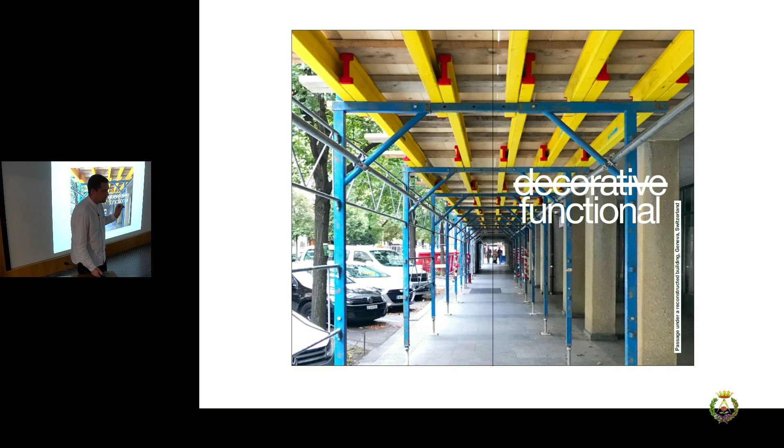This is a very interesting typology in Switzerland, which marks the future building for the democratic process of voting for the future development. So these sticks are not just there, they're marking the future development, and it's not at all decorative, it's functional, because when we analyzed it, each color has a meaning. These colors are not chosen because architects decided so-and-so, but they mark danger, or they indicate there's flammable liquid, and so on.

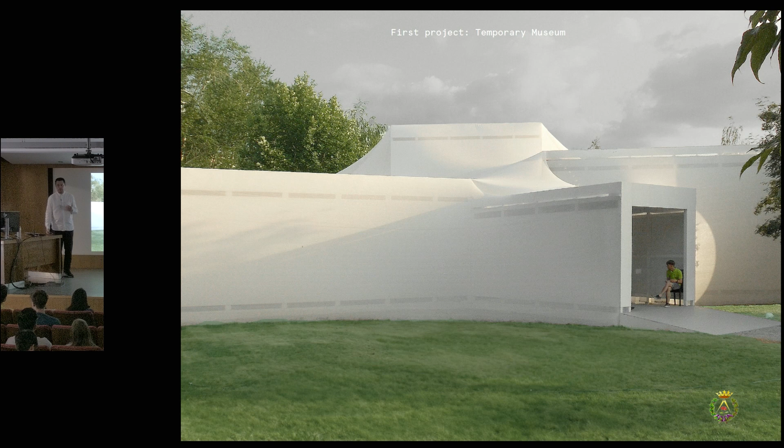And these kinds of structures were also a source of inspiration for us. And the first project, our first won competition, and the first project built, was a temporary museum. We used debris netting, the nets which you saw in many of these examples, this material which is probably known to all of you, in order to make this temporary museum.

And again, speaking about this temporary-permanently idea, there was a museum already planned by OMA, by Rem Koolhaas, in this place in Moscow, and they were not able to finish on time. So in order to open something, they decided to make a kind of museum for one summer, which preceded the main one. Again, we saw, and it was our first lesson, how these temporary structures are actually quicker and maybe more efficient.

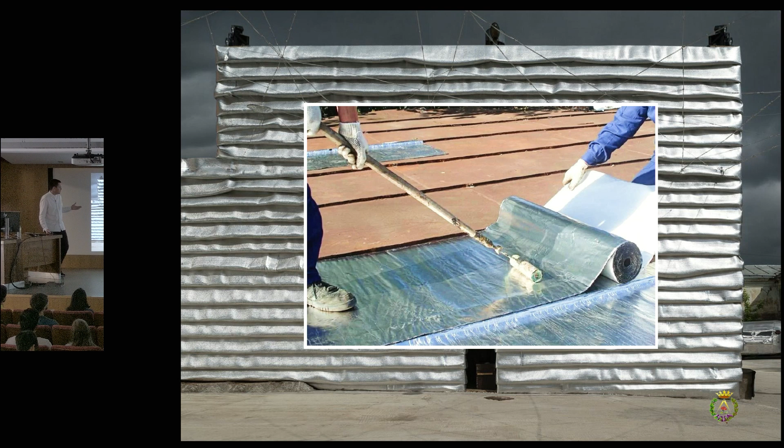And then, of course, all these can be disassembled and reused further when not needed anymore. Our first transformation was also an old factory, then temporarily a cultural hub, and then it became future housing. Again, temporary materials, such as this material which you probably know, used for roofing or insulation, was used in order to quickly transform this space into something very different, and then to be reused again.

But the first project which I would like to show in detail is the one which the organizers chose for the cover. Therefore, I felt that I have to start with it.

It's Nike Box Pavilion, and despite it being quite a well-constructed building, it was officially supposed to be a temporary building for the World Championship of Football, which happened in Moscow in 2018. They needed an infrastructure in the park for sportsmen, but not professional sportsmen, rather to promote sports amongst children, footballers, and basketball players. So they made a kind of multifunctional playground.

We thought that it's a very short-lived event, and we started to think how to create an infrastructure not for sports, but actually for people, that could later transform. As you understood, we quite like this infrastructure architecture. We tried to learn from it.

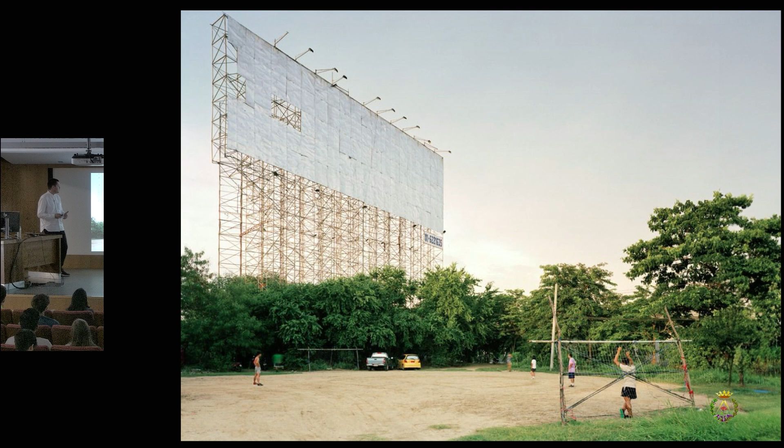Back then we were living in Bangkok, and we saw this image of a beautiful abandoned Bangkok billboard, which didn't carry at the moment any logo or brand. There was also this guy who was holding onto something similar. We thought, what if we create something like this, quite a neutral, simple, practical infrastructure, which can later serve brands, serve people, serve different activities.

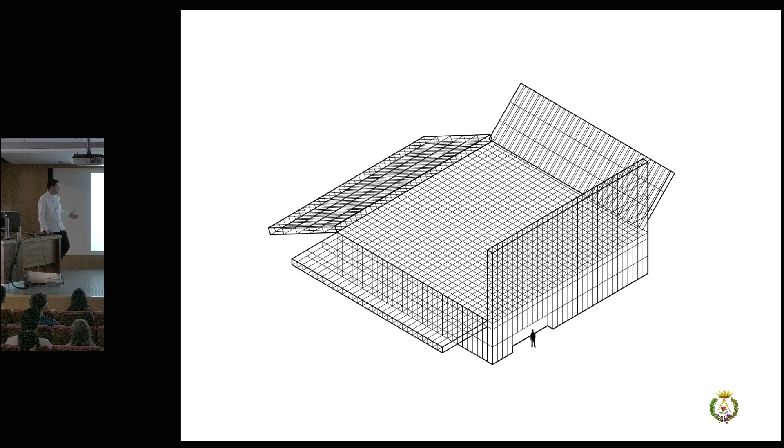Back then, this was a project for football. It was Nike who promoted it, but you'll see that in the end, the story was a bit different. So we proposed a structure which would locate it differently in the park and have different reasons.

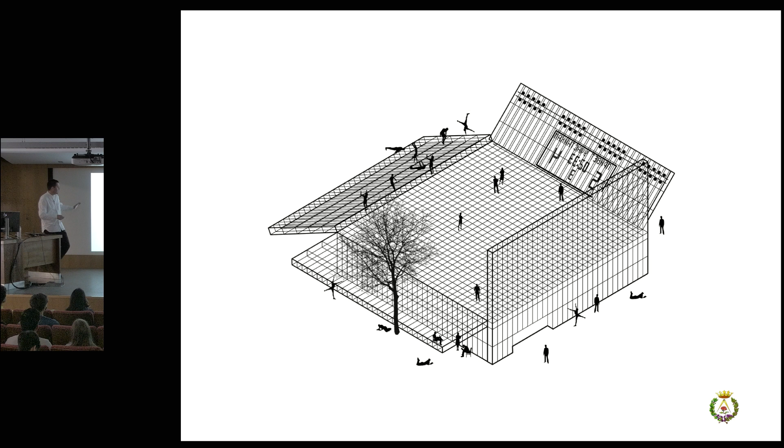There was a main kind of billboard which was showing the entrance to the park. There was a canopy where the running club would get together. This space was oriented to the football field, so it could have a score. And this was a place where people could stretch and also access the rooftop.

This was the project realized, and it was a very simple membrane made of metal, which also permitted not killing the trees in the park and allowed it to be built around them.

It was a completely open structure, so even all the MEP technology, all the ventilation and so on, was purposefully exhibited outside, and as you see, it allowed both nature and people to coexist, despite its quite industrial appearance.

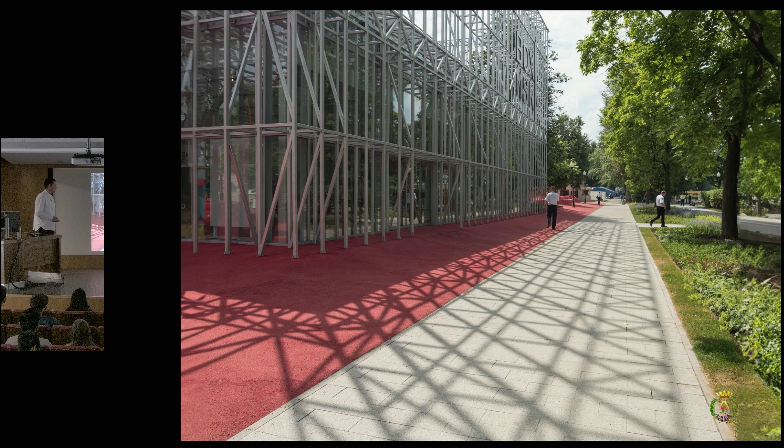Due to this lattice, it also created shadows, which create another layer of impact of this building. There was an interior facade, a second facade, and a shadow and lattice of shadows. What was important for us also was to make what we call the naked building, a building which is completely visible from outside, completely sincere with how it actually functions.

So here you can see the back of the lockers with the storage room and the room for all the electronics, which is visible. What was also important was to show the connectivity of this building.

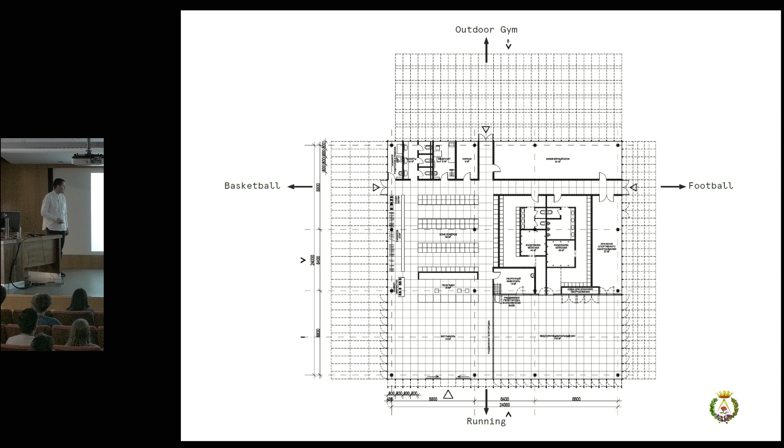In plan, it was a very simple plan with a cross, with two crosses and two directions. One would bring you to football, one would bring you to the outdoor gym, to basketball, and to running. There were two corridors like this, which would cross the building.

This was already one of the first moments during the event, we saw that this sports hall, which was completely openable and transformable, and also had lots of mirrors to blend it with the park, was used also for events. That's how the building was built.

After it was inaugurated, it started to live a second life. Again, speaking about temporary, despite the fact that it was made temporary, it had a very low foundation. It was designed to be later disassembled.

Six years later, thanks to the fact that you put it on the cover, I went back to it and looked at what's going on. Six years later, it's still on. It changed completely the reason many times. There was everything from carving pumpkins to textile workshops to book presentations and so on. The logo of Nike went away, the sports function went away, and sometimes it's even decorated for city festivals with some random decorations.

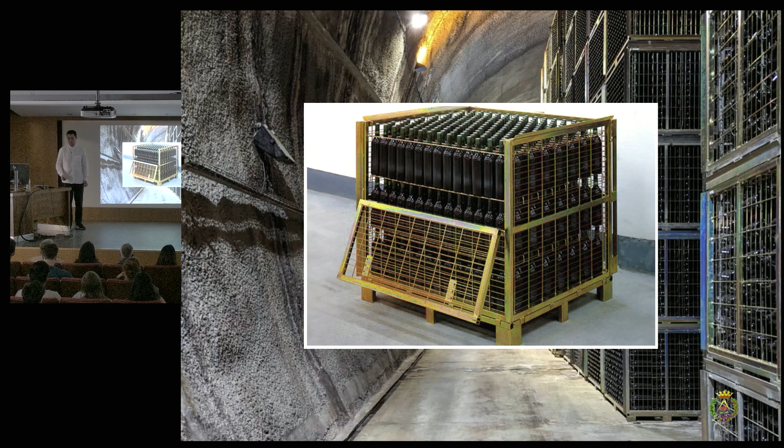But we saw that there is a huge amount of this material, which is called jaulones de vino, which are cages, huge 1 by 1 meter cages of wine. Here you can see them fully functioning, so each one contains hundreds of bottles.

But when I came and took some pictures from behind the fence, we saw that actually, this is a little photo, but thousands of them are standing idle during almost half a year. And the task, if you know Concéntrico, was to create a city pavilion almost without any function.

So basically, we're always thinking about the resources when we start working. And the idea of wasting some resources just for one week was, of course, not very dear to us. So we thought that maybe we can work with this.

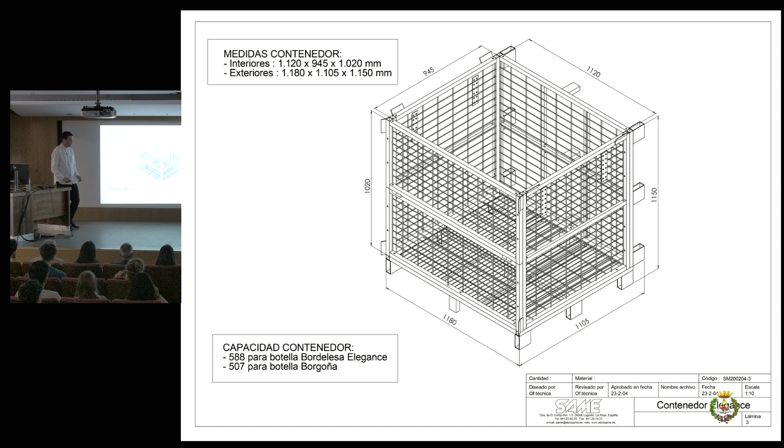We worked with the local producers, Same, who were really metal producers who were only doing these cages in massive amounts. And it appeared that these elements could be constructed into quite high structures, and they could be dismantled also without any further impact.

So again, trying to counterpoint the permanent and the temporary, we placed it next to one of the city's big cathedrals on the esplanade, and created a little kind of basilica-like pavilion from these jaulones, which also served the same reasons as the church, but with a much more modest ambition, and for a very small period of time.

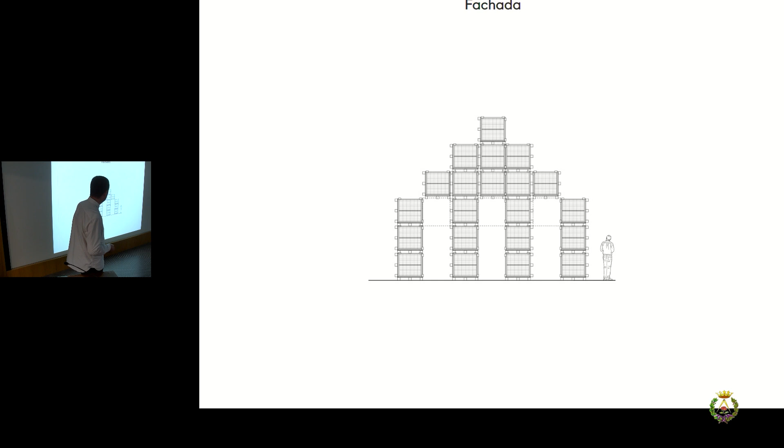So it was a very simple section, a very simple plan, like a simple basilica with a very repetitive structure. And then we just installed them there with the producers, so we didn't even need a construction company, because it was a super elementary process.

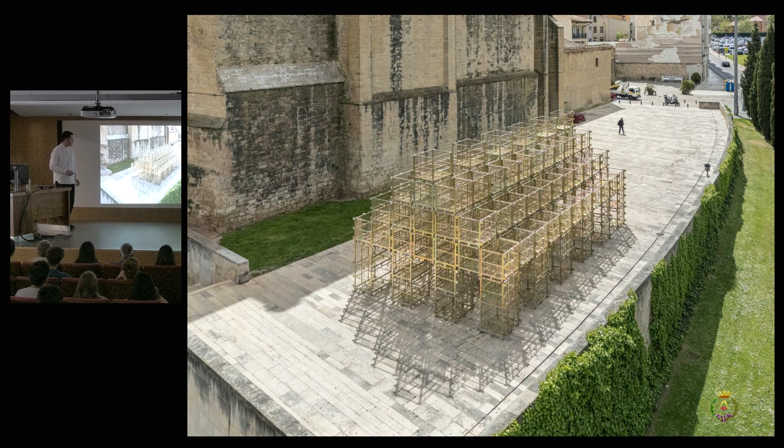The main thing was that it would give shadow and a place to gather. So actually it was like a very big lattice to give shadow, but it also became a place for temporary gatherings during the festival.

When we found this material, we kind of believed in it completely, and we saw that it's very beautiful, again like these pragmatic solutions, they are inherently beautiful, and you just need to kind of reveal this beauty and see it. It was not only a very intricate interior, which even if we tried to design something like this, we probably wouldn't manage in such a short time.

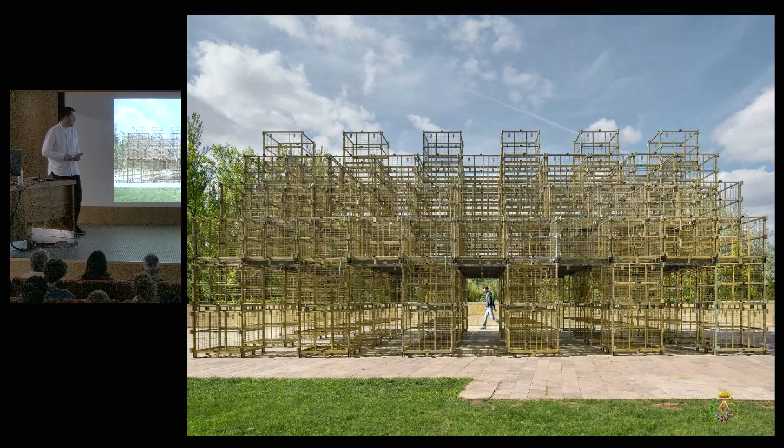It also had a very strong material presence, which the producers told us was just because of the galvanizing of the steel, that it has these beautiful color changes. Sometimes you see them green, sometimes yellow, sometimes pink. And this was not at all something we could predict.

Later, after a series of events, it went back to serving, to storing the wine, and this kind of pavilion left zero presence, which is also very important for us, because we think that's how we should think as architects, that even if you build a very big building, the impact of it can stay forever. And what is this impact?

Then another project in Spain, speaking about a similar topic, about the resources, is called Permanently Temporary, and it's the same name as this lecture, and it was for us a bit like the point which we wanted to make. We were invited in Barcelona, you probably know this little city, far away.

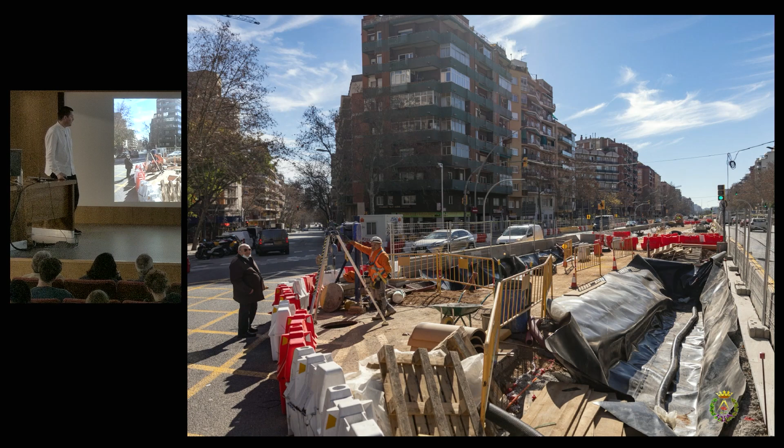And actually, no, it was a kind of a Madrid-Barcelona joke to wake you up. Yes, this little village.

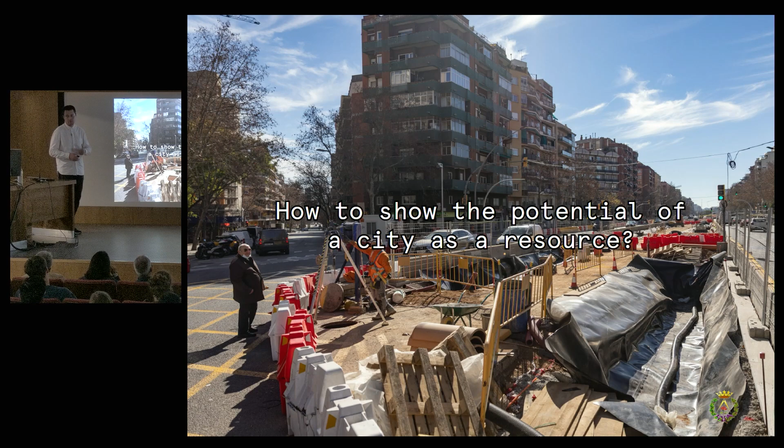But coming back to Barcelona, it was a festival called the Model Festival of Barcelona. Our idea was to reveal the hidden resources of the city. It was a symbolical project for us to speak about the topic of resources in time. We thought, how can we show the potential of a city as a resource? Because you can imagine how much resources are constantly in the city.

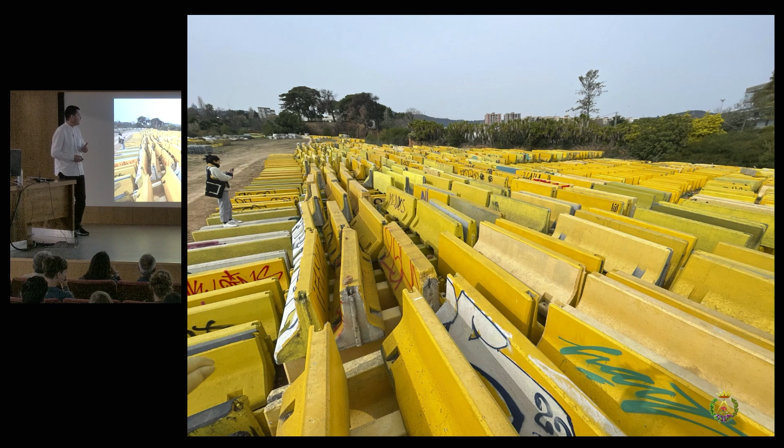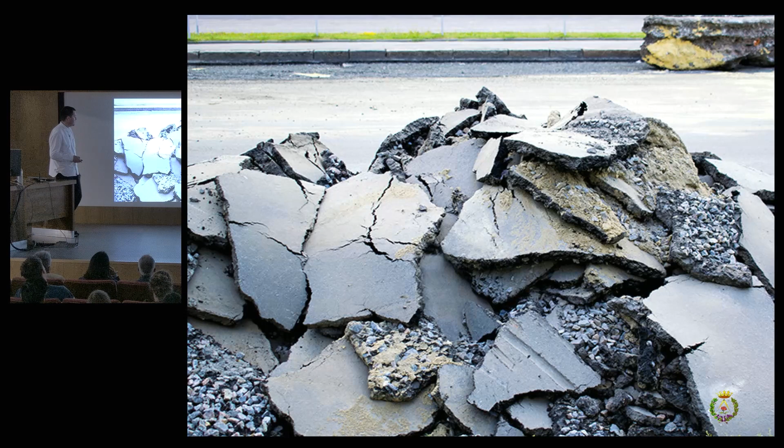We made a tour through all the periphery of Barcelona and saw many storages of enormous amounts of materials. For instance, 2,000 jerseys just idling on a huge square without any necessity. There were random materials, materials for protection, tons of asphalt not used, and some material which was completely new just standing somewhere in huge amounts.

There was a huge tunnel made with a defect, and the company Sorigué had thousands of these panels stored and didn't know what to do with them. There were also water things, but the most amazing moment was when the city of Barcelona invited us to these treasuries of historical monuments.

We were really like in a cave of treasures, with hundreds and thousands of old sculptures, sometimes slightly broken, sometimes not, which didn't serve any purpose. We chose this, Minerva, to help us build the pavilion. There were also incredible spaces like this.

We called it the Trash Guggenheim because it looks like the Solomon Guggenheim Museum in New York, but it was actually just storing some old windows and panels. There were Gaudi doors, and pieces of Enric Miralles' Tir amb Arc, which has been standing there forever, and so on and so forth.

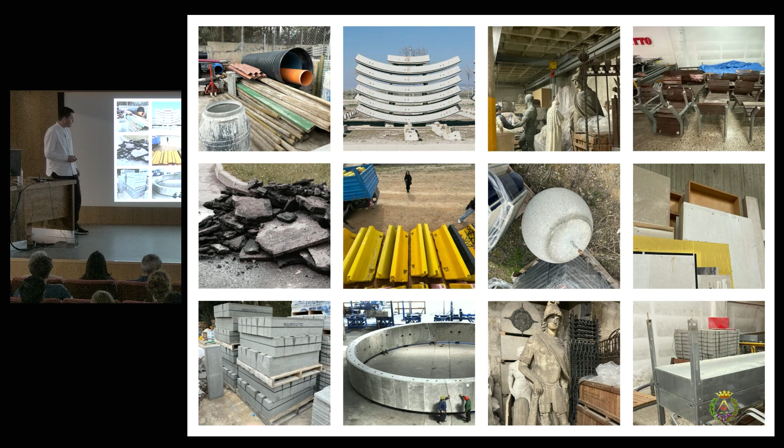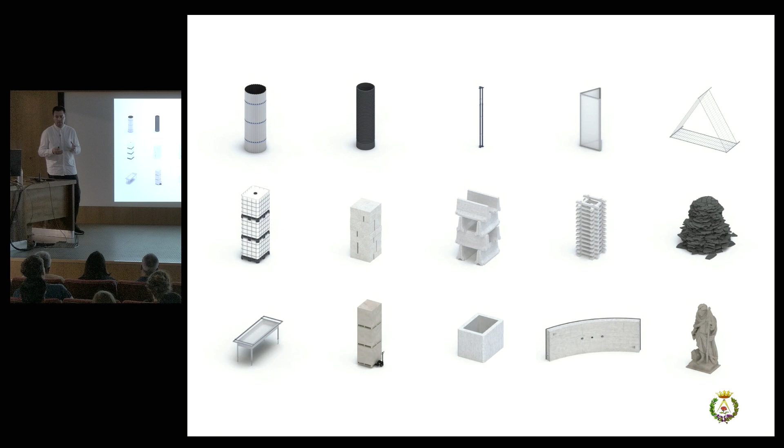So then we made a selection of these elements and created a catalog of them, trying to focus only on elements which have a very permanent image, very mineral, very heavy, in order to show that they exist and even they can serve a very permanent role while showing the resource.

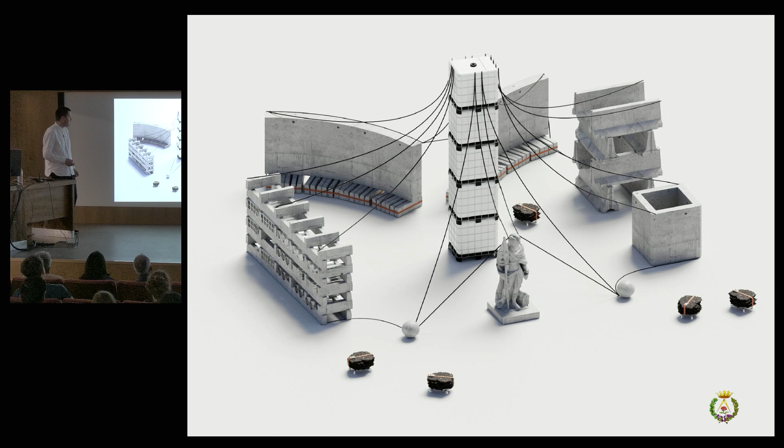We united them in the park, quite in the center of Barcelona, in a certain composition to create several spaces, then used the debris netting material you've already seen to cover it and create a space which served as a lantern at night, a kind of gate to the park in the morning, a space together.

It also had exhibitions about these spaces we visited, giving knowledge about the city's resources, and also served as a place for parties in the evening.

What was important for us, and what this sculpture was showing, is that we used these elements without sentimental or historical reference, but really as a resource. We respect the author of the sculpture, but the fact that it served as a column was more important than if it stood there in the center. The water cages, usually used for producing and giving water on construction sites, were used as a central element and as the light.

We also tried to underline the contradiction, but also the coexistence, between the very permanent and the very temporary in this project. We created an outline of the most sturdy, mineral materials which last for ages, hugged by a very thin textile, creating a bit of this contradiction.

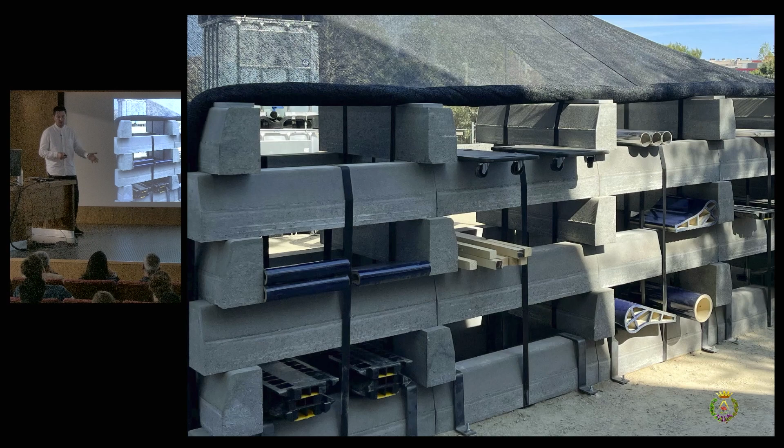There was also a storage of materials we found in the city which people could theoretically take in order, and even bring and exchange. This never worked because they put a security guard who didn't let anyone touch it.

But at least we managed to run a workshop on the deconstruction and disassembly of materials with some of them, and citizens made some little furniture pieces with them. Right next to the pavilion was another huge resource showing this coexistence. And, similarly to the Logroño pavilion, it was fully disassembled and went back home.

The last of these temporary projects I'd like to show today is one we just finished, a little project done by my students in the studio where I teach in Geneva.

It's a project of my students, done in the studio where I teach in Geneva, and there's actually some institutional friendship going on here. It was done for an event called, very boringly, Europe's Day of Heritage.

Even the name sounds a bit boring, and the event itself isn't very exciting—people go into old buildings with bureaucratically organized excursions. We thought this event should be about the people, because people are also heritage of the city. It was happening next to our school, on this huge green field.

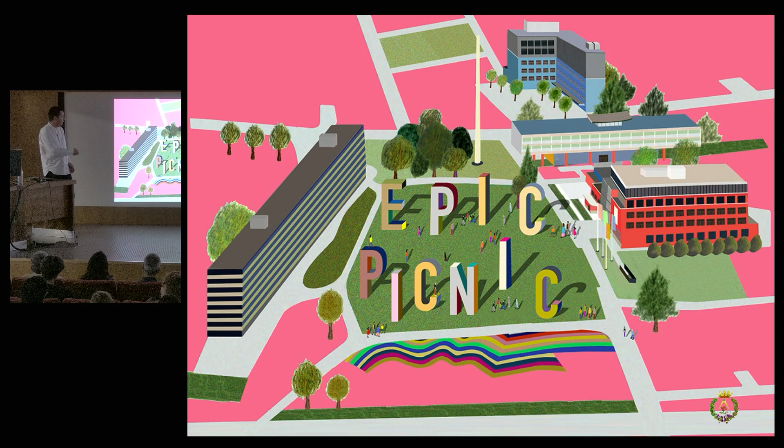The students were thinking what to do there, surrounded by important historical buildings that used to be old factories. They decided nothing was simpler than proposing a city picnic around these buildings. They liked that this simple act of putting up a picnic was very unaggressive to the surroundings.

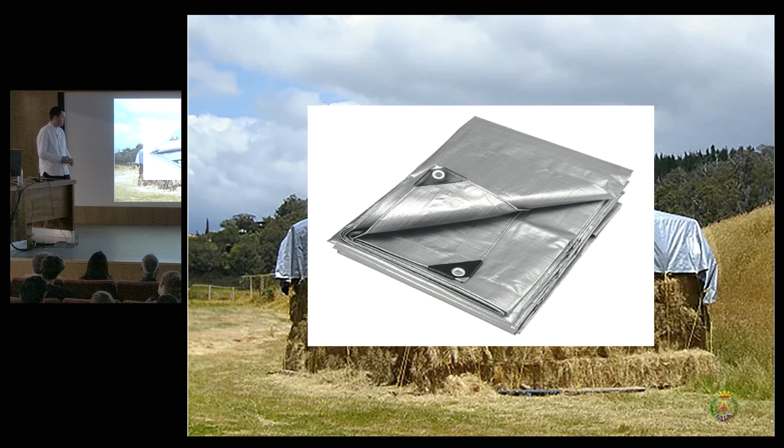Speaking again about infrastructural materials and temporary solutions, there was quite an ingenious idea: an agricultural thick tent used for this project, a simple blanket which, with the help of a few poles, transformed into little pavilions that gave shadow and revealed the grass.

All of this was done for just two days—it was only last week that we disassembled it. The people from the neighborhood quite liked it.

Another element was an old fountain, part of this scenographic and playful project. The students proposed evacuating the water for a while and transforming it into a pétanque field—the game of throwing balls, quite typical in the French-speaking part of Switzerland.

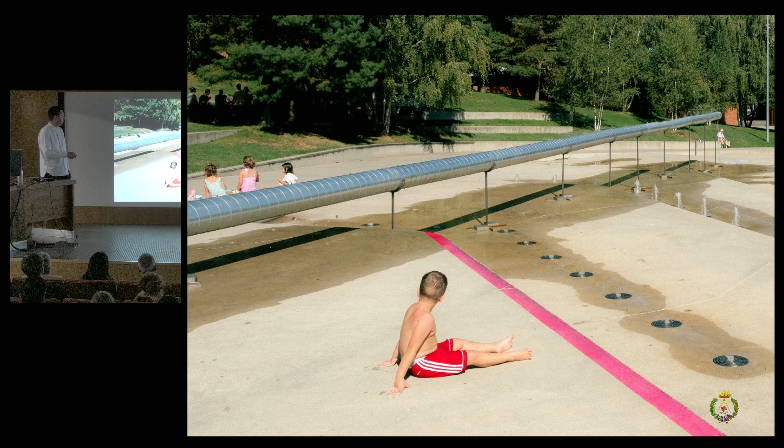That was the second project. They reused some old office carpets they found, and the last installation was a kind of ventilation pipe that served as a temporary fountain.

One more thing, since this was about heritage days: the students proposed flags designed as a metaphor, referencing one of the main bridges in Geneva, each commemorating the city's heritage like a flag.

The students mixed things—for instance, a famous kebab place in Geneva alongside a famous modernist building, a church, a building by Le Corbusier, and a skate park. They combined kebabs, cathedrals, skate parks, and Le Corbusier to show that heritage is not only what's written in the history books.

The last, funny moment: we wanted to show these historical buildings—for instance, a modernist building by Georges Addor, a very famous Swiss modernist. The idea was to let people go inside, but due to the rules, it wasn't allowed.

So we put up a kind of pavilion saying 'serve yourself, come here'—but then it said access interdit. So: servez-vous, access interdit—serve yourself, no, you're not allowed—to show that some things could work if the rules were just slightly less rigid.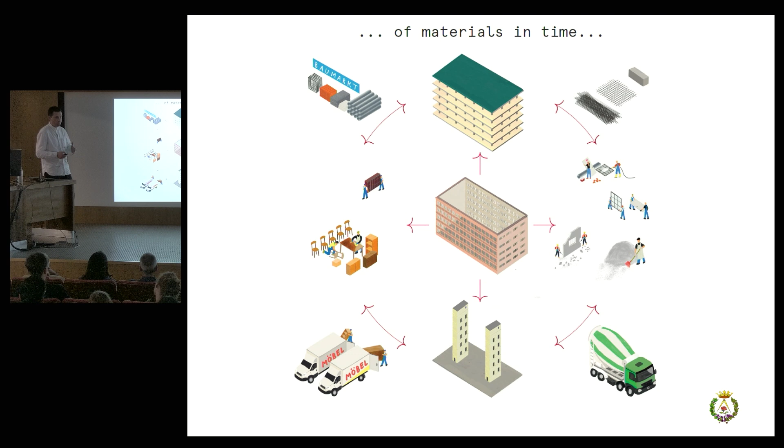So here we think that we can start thinking of transforming from chief builder to a chief curator of space, materials and time. Any building, even a very permanent one, is in a way a temporary moment of materials and time, because materials come and then they're exchanged. But we can also imagine that any building can be a different space and time. The more we work on this topic, the more we believe this is how we should start designing buildings, and never think about them only in one single programmatic way.

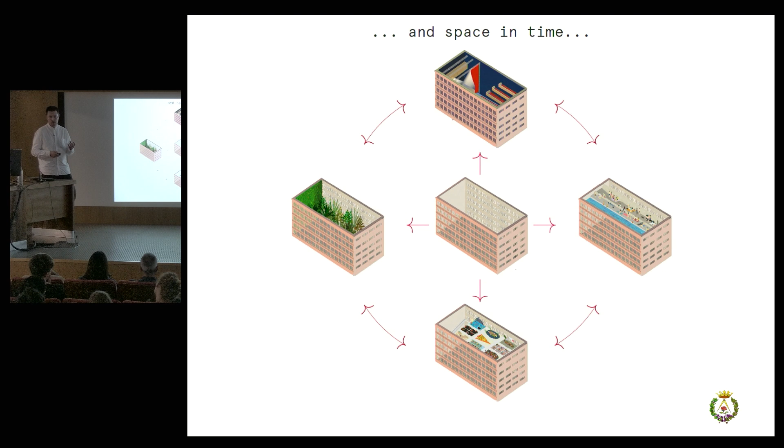So the first project I wanted to show, the first in this second part, is the Stadthotel Triemli. It's a renovation, a competition which we won. In the periphery of Zurich, there are three skyscrapers, a Swiss standard, just high buildings made in the 1960s, and they used to be residences for a hospital, but now they are not in use and they don't know what to do with them.

The city wanted to demolish them, and then a collective from Zurich proposed to make a competition in order to save these towers, because they really believe this is a valuable resource and it would be a shame to demolish them. The problem was that we were transforming buildings which had kind of failed to perform.

And the first question—we started to think how to create buildings which last for ages, because obviously we have to build for ages and not just temporary solutions, but so that in 30 years you don't have to demolish them because they're not functioning again.

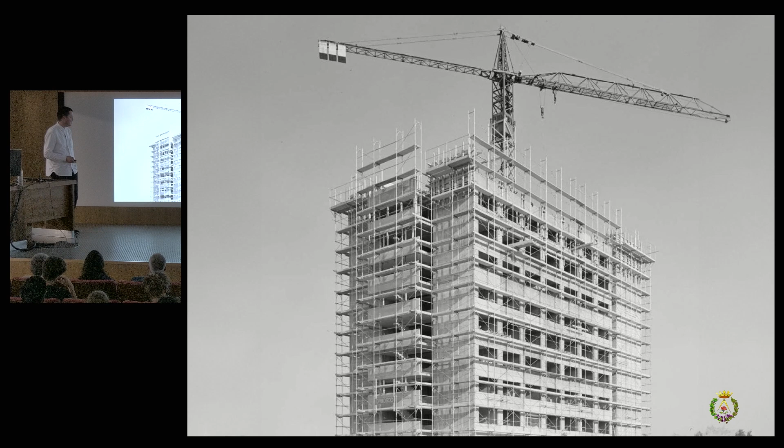So we looked at the structure of this building, with some historical photos of how it was constructed, again trying to understand the materials and the space. And we came up with an idea which we called hardware and software.

Habraken already spoke about this in the 60s when he talked about transformable buildings. We decided to conceptualize and say that buildings actually have much more layers, but in a simple way we can divide them into two layers. One is a kind of permanent structure for ages, like the bones of the building, and the second is this temporary architecture, with a smaller span of time, which is the facilitator of change.

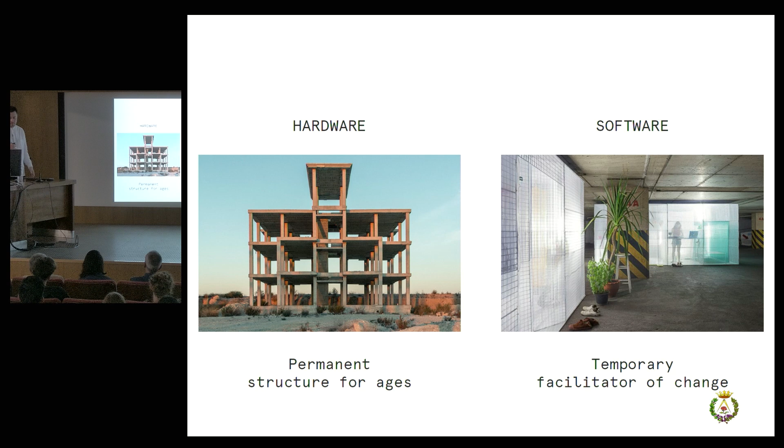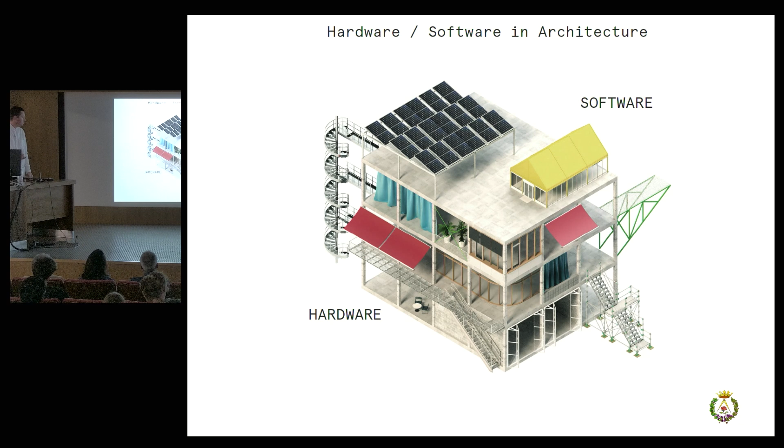So you don't need to demolish the whole building, but you can change these temporary elements for programmatic, climatic, financial, or different reasons. We started to analyze—for instance, in this diagram, the concrete would be the hardware, and all the more colorful things which protect us from the sun, which divide the space, which provide access to energy, can be called software.

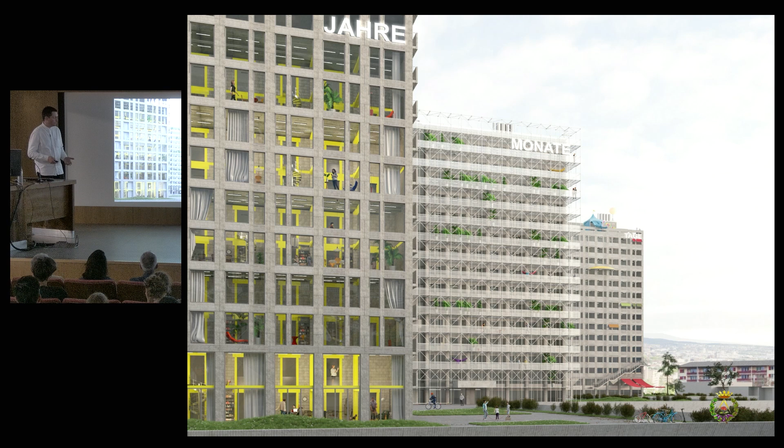Then in order to make a point with this competition—there were three towers, and we proposed three strategies for them. One would be a strategy where the city would need years to transform the building. Another one could be done in months. These are German words for years, months, and the last one in days—meaning you could almost immediately start to occupy it.

We created, let's say, an instrumentarium for this: for days, that would be furniture and very simple temporary structures; for months, something like scaffolding structures; and for years, it would already require serious transformations of these buildings so that they could function.

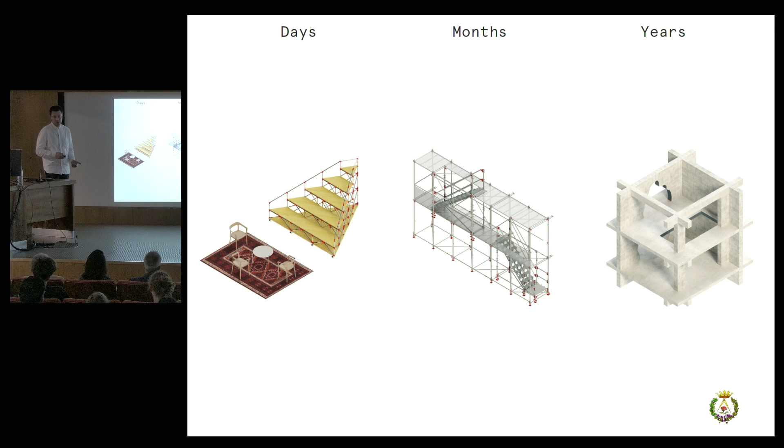These spaces could already be occupied and transformed within days. So this was the proposal for the first tower, which would be kind of a temporary use.

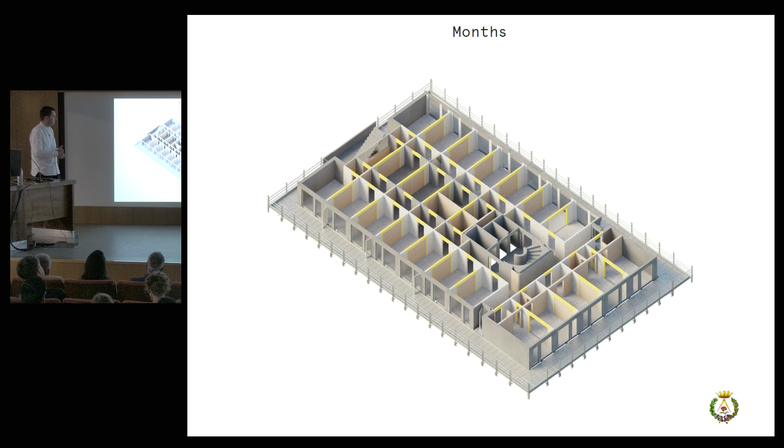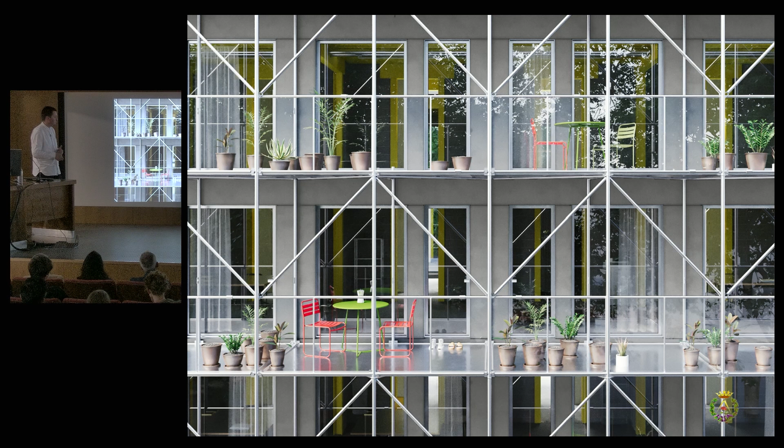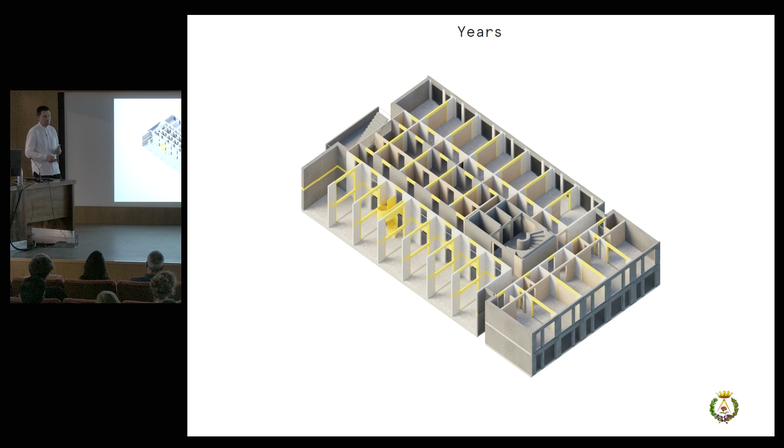That would require horizontal circulation. The last phase would already work with the slabs, creating a series of double height spaces allowing for areas with lots of people and multiple processes. This would require years and more serious transformations. It was a very political project, many proposals were made, and unfortunately the project is not going to be built as proposed.

But the good thing is that after all this interest in the project, the buildings stayed not demolished, and the city decided at least to stop the demolition process. Now they're thinking what to actually do with them, and they're using them as temporary refugee housing. So at least there is something, maybe not for our office, but for these buildings.

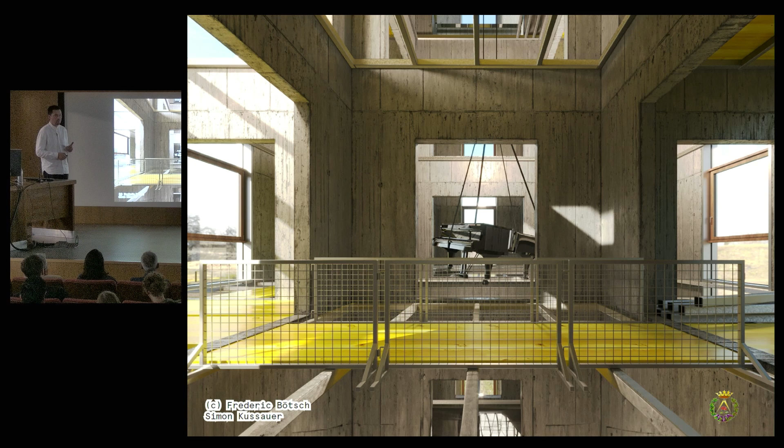After this, or together with this concept, we started to develop it further. My partner lives in Austria and teaches in Vienna, and they continued this strategy, working with different historical buildings. This is work from some of his students in Vienna, using similar logic to transform problematic concrete buildings that exist all over Europe, figuring out how to transform them not just once, but so they continue as resilient and transformable structures.

Now, to change the scale a bit, I would like to show three transformations of three little houses which we are doing.

In order to transform these houses, we took the idea that sometimes you don't need to add many things, that sometimes you can subtract, cut, and therefore get more. The first project, which I was just speaking about with the commune one day ago about its realization, so it's an ongoing project, is at Geneva Lake.

There is a big, beautiful old house, and then there's a building called the Dependance, kind of a little grange attached to the historical building, a very beautiful 19th century structure. But the problem is it's very long, and now it serves no purpose, working almost like a carport, just a canopy for cars. The clients wanted to transform it into an apartment, but the problem was the historical building.

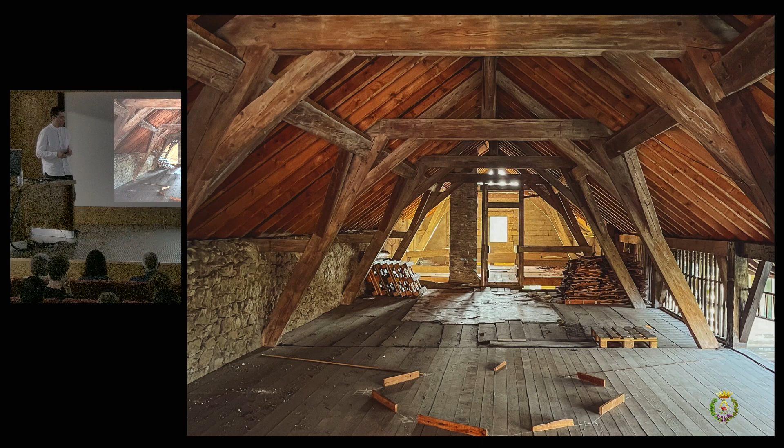You can't touch the facades, and it has a very long, narrow space with almost no light. There's one window on one side and one window on the other side, and this is just a missing part of the wall. Otherwise, it's not working.

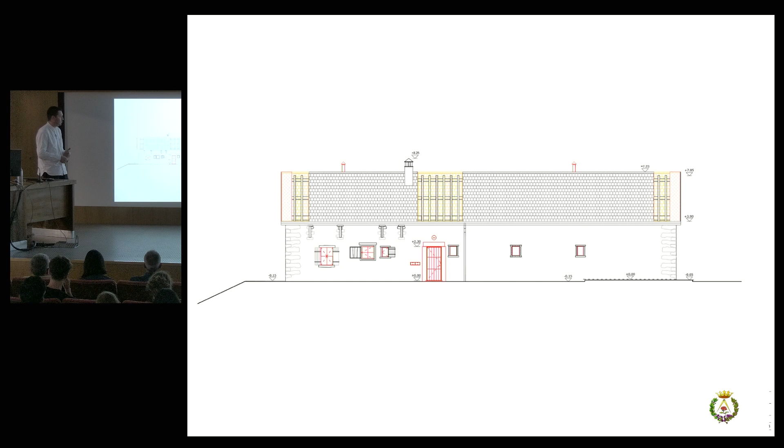What we thought is maybe we could work with it by making an internal cut, which will give us light in a middle courtyard in order to create two living entities, and then the house can start functioning. So what we proposed is to not touch the facades, but to remove part of the roofs without covering them with glass or anything. There would be, on each extremity of the building, one kind of balcony giving light to that part of the apartment, and one internal patio.

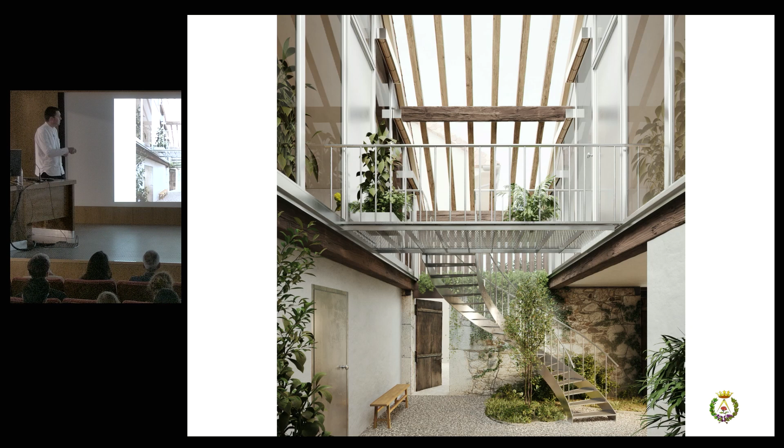On the ground floor, you would enter through either the courtyard or from the street, appear in a patio, and then go up the spiral staircase. This patio unites and at the same time separates the two apartments. As I said, it's not glazed, so there's rain and snow here, which is supposed to be there when they come.

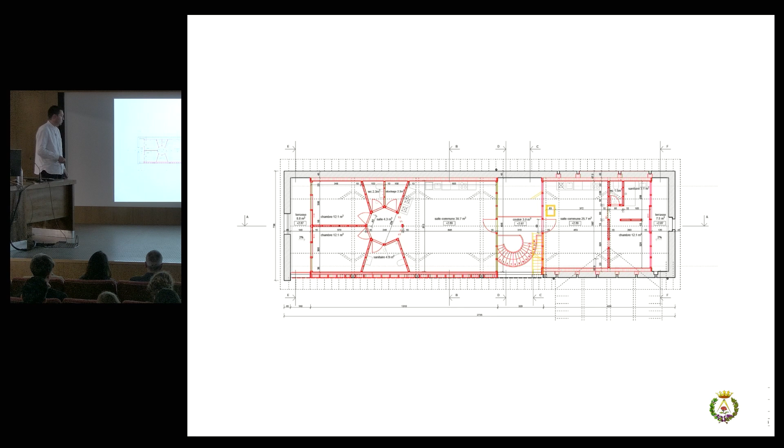On the second floor, you have two separate living units, whose sleeping rooms also get light from each side. That allowed us to create this house without making the apartments too short, keeping normal proportions. This is the vis-a-vis moment of the two apartments.

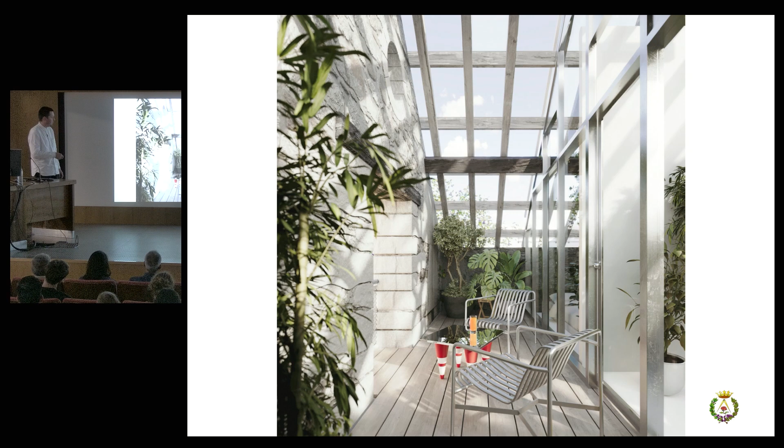Of course, it's a very close living situation, but at least it's possible. There was a little gimmick in the plan: before coming to your room, you would pass through a kind of room with a bathtub, storage, and access to your own rooms, and you would not know which door to go through. Then you would arrive at one of the two bedrooms, and finally you'd have this historical wall with the elevated patio of the balcony.

A similar kind of logic, but a very different house, of a similar scale. It's another rural part of Switzerland, the Jura Mountains, also French-speaking, where a beautiful old house, less historical maybe than the previous one, and the barn for animals were owned by the clients, who wanted to transform it into a big house to be there in summer and winter.

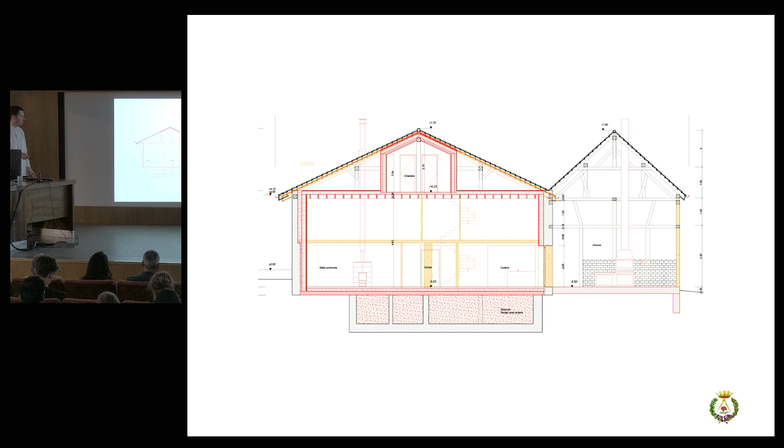And in this house, the operation we do is remove the slab from here and create a double-height room. So here you can see the section. What used to be several little houses becomes one big space for gathering, and the right one just reveals this big space which was already there. And a simple plan, as is supposed to be in a village.

And the third house, probably the quickest one to get built, almost finished now, is in Vienna, Austria. It's a much more banal house, much less beautiful than the other two, and therefore probably easier because it has fewer problems with the heritage authorities. It's in the periphery of Vienna, a quite generic villa from the 1970s which the client wants to transform.

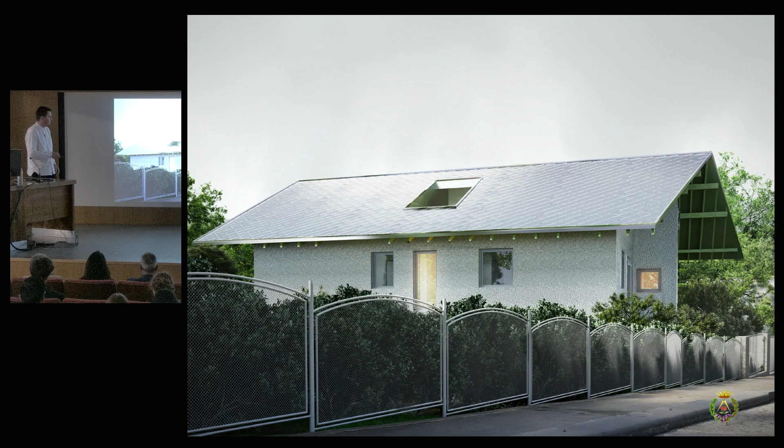So this is the project idea. It has several openings in the rooftops, similar openings in the interior and the facade, which allow us to create special moments that were important to us, connecting you either with the outside world, with other rooms in the connecting enfilades of rooms, or with the terrace, and so on.

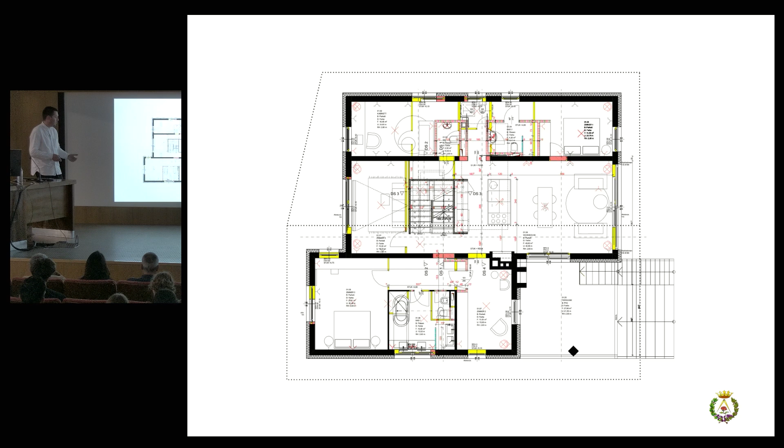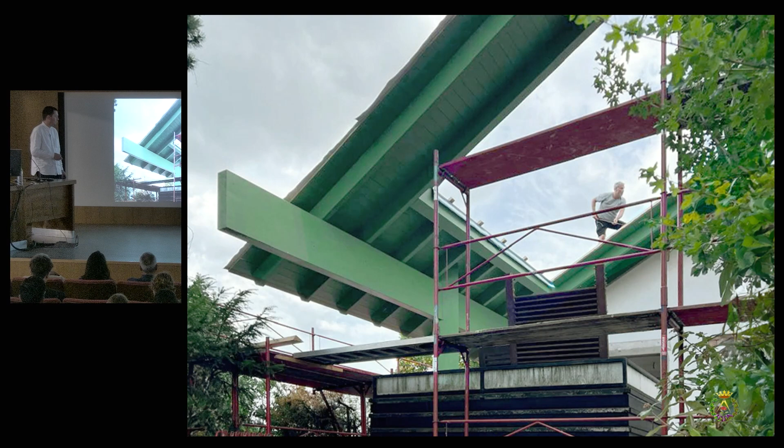So for this project, these are just some construction photos, uniting also the different levels, and cutting different openings in order to make it a new big house.

And I will finish with two projects. This is one that gathers several together - a community in the mountains. It's a project maybe a bit different from the others, but you'll see that we try to use similar strategies. So Chateau Chapiteau is a nomadic community in the mountains.

It was actually quite funny how it's located - in Georgia, quite far away from the main city, Tbilisi, really in the mountains, a bit in the middle of nowhere. Our clients are a kind of community of fun people. The main one is a businessman who decided to downshift and sell everything to buy property in Georgia. They crowdfunded

this place, and they started to live there. So they have very minimal resources. They try to make a kind of agriturismo there. They try to live there, they live there. But at the same time,

our question was how to shelter this community with minimum resources, but keep it maximum fun and relaxed. All the money for construction is crowdfunded - they invite other people to buy shares in their project, and then they build with it. And the second thing is that it's all auto-constructed, so the community itself is building it.

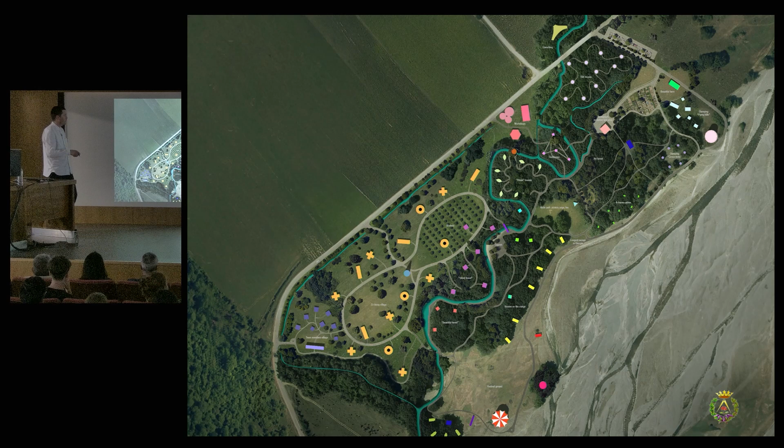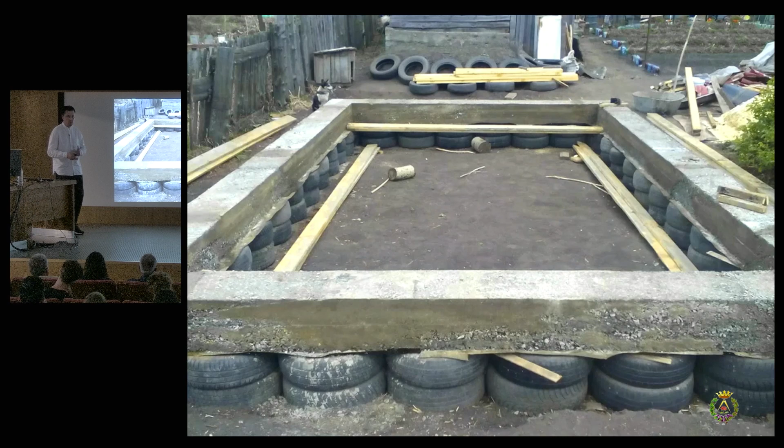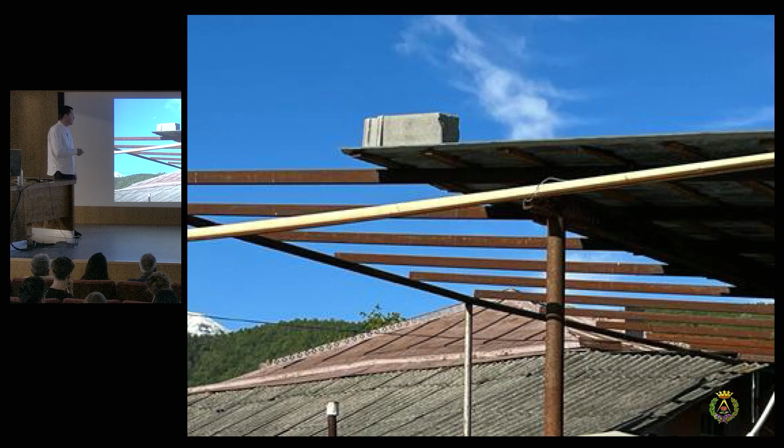But when you look at the local materials, there are agricultural barns next to it. In this beautiful place, the most typical and cheap affordable material is corrugated metal. We started to look at the materials now available at the place. Another one was that they quite often use old car tires in order to make foundations. We looked at some other vernacular things, went to the markets, and because the first project we did for them couldn't be built for purely technical reasons, we decided to go there and really choose the materials and understand what they offer.

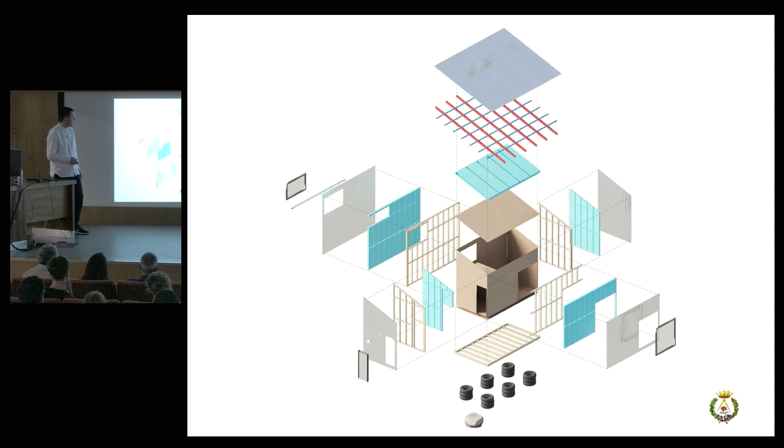There are several of them now in the forest, using this local material and trying to be in harmony with nature. One little detail, speaking about the way we work with material, is that they had only the most banal plastic windows, and we thought of using one of them but putting it at 45 degrees in order to create this little moment of something special, while using the most available and cheapest thing on the market.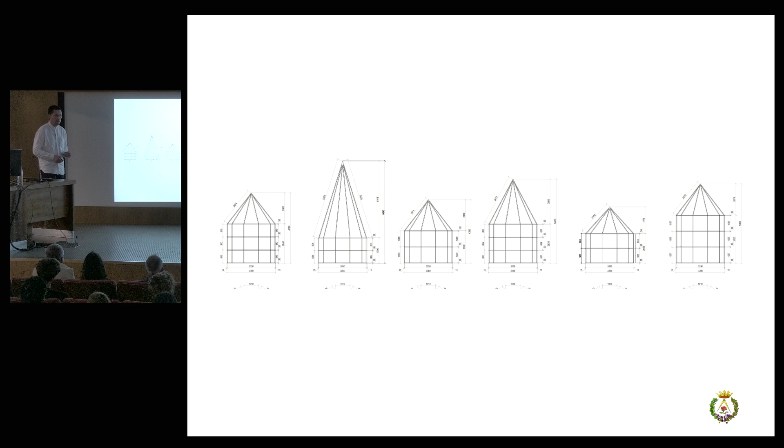Here you can see the inside, and the second one was an even simpler idea. It's another typology of these little houses for them, which we called fairy tale tents. We looked at both fairy tales, because that's what they are, but also something very pragmatic, like this Napoleon's temporary kind of tent. We proposed to make very simple metallic structures.

And then to use the only luxury that we have, which is the use of color. We created a series of textiles which would cover these diverse tents in the forest, creating a basic shelter for them, which worked as lanterns in the night.

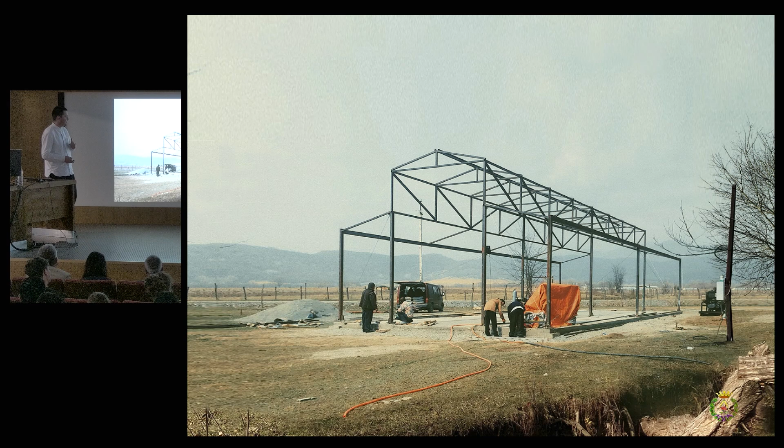And the last project for them was the only public space they have for the moment, called the Temple Barn. They asked us that they need a workshop and a place together. At the moment when we were already working, they bought this agricultural barn and built it there. By the time we were thinking longer, they already started to cover it with this ugly corrugated metal of a dark brown color. So when we started working, we already had this. It was a transformation of what was supposed to be a completely new building.

We started to think, what can we actually do with it? How can we finish it and transform it into something meaningful? The more we looked at it, the more we saw a resemblance to a typical basilica. As you know, in basilicas these facades stand in front of usually a brick structure, at least in Italy. So there's a moment of representation and a moment of pure logic, like a warehouse. The first little thing we did was make these internal lights.

They have really minimum resources, so sometimes we call this project 'how much can you do with a bucket of white paint.' We proposed to keep the original dark brown, orange color, but to paint it, because it also has quite a nice effect if you just paint it straight on the corrugated metal.

And we created the pattern, and again, the whole community has painted it. We made some little details, like we created these little wings and circles to store things outside, but all the rest is done purely by pattern.

We also referred to the Tom Sawyer story, when the guy was supposed to paint the fence, but then he gathered all the people around him, and it created a kind of common action of painting this thing.

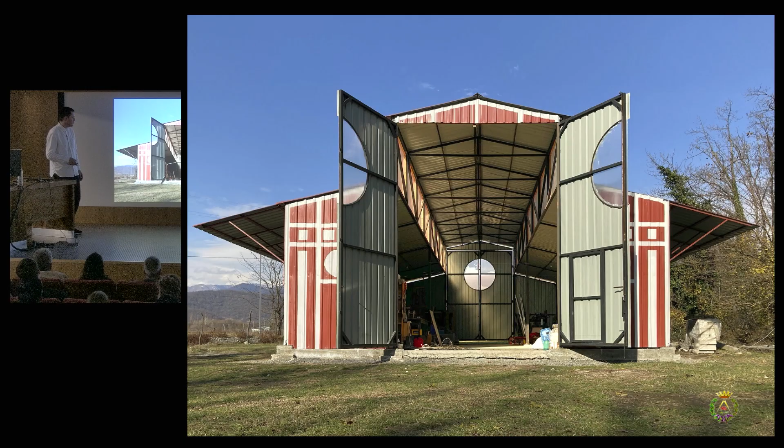The last project for today speaks about a bit more serious types of technology and a more complex typology. It's the Zug Crea Towers. It's a competition we did in collaboration with Jan De Vylder and Inge Vinck, Belgian architects, good friends of ours. It was an invited competition. Unfortunately we didn't win it, but we are quite happy with the result and with the lessons we learned from this project.

The location of this project is Zug. It's an extremely rich and contemporary city, quite small, in Switzerland. It's known for the fact that there's lots of new technology - all the startups and big companies have their location there. They are also very contemporary in terms of taxes. So it's a highly technological city.

For a city of 30,000 inhabitants, they have world-class architecture by people like Valerio Olgiati and other famous architects. They have many towers, and a new tech cluster where the new project was supposed to be done. It was supposed to be an office tower.

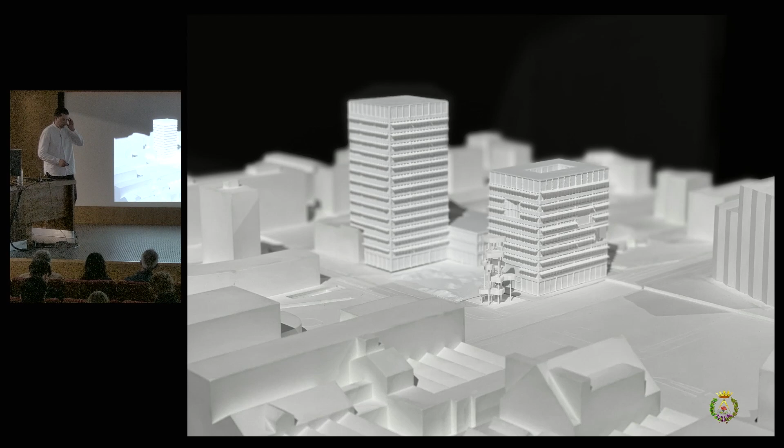This professor, this architect, Professor Philippe Block, is very famous - if you don't know him, and I'm speaking to the students, check out his work, it's highly technological. He works a lot with vaults, and has created a company called Ripmann Floor Slab, structural engineers.

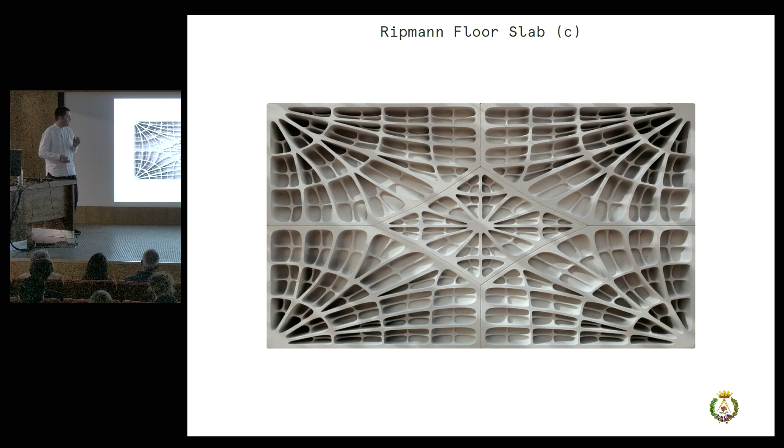It's a very smart concrete solution which uses the logic of Gothic cathedrals, where they use concrete slabs, but due to a very complex series of ribs, they can save a lot of material. These floor slabs, in the simplified version we were using, save up to 40% of concrete, and if you calculate the CO2 emissions, they're actually more ecological than building out of wood.

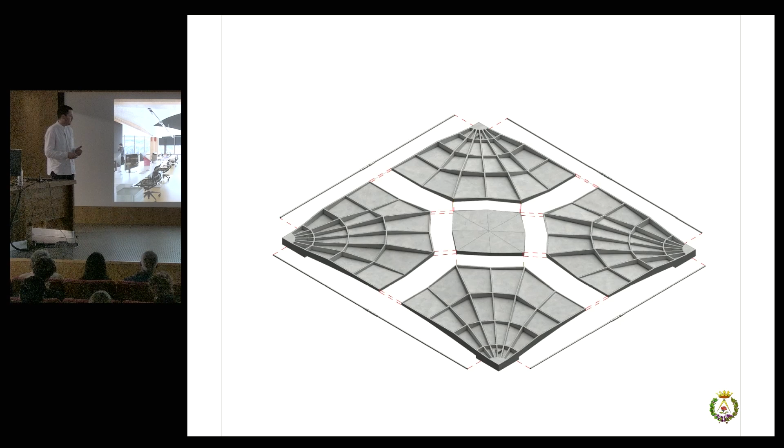So what we created was a building where the beauty of this strategy is that there are 4 cornerstones with 1 keystone, and theoretically this keystone can be replaced by a core, by a toilet, or even removed, without affecting the structure.

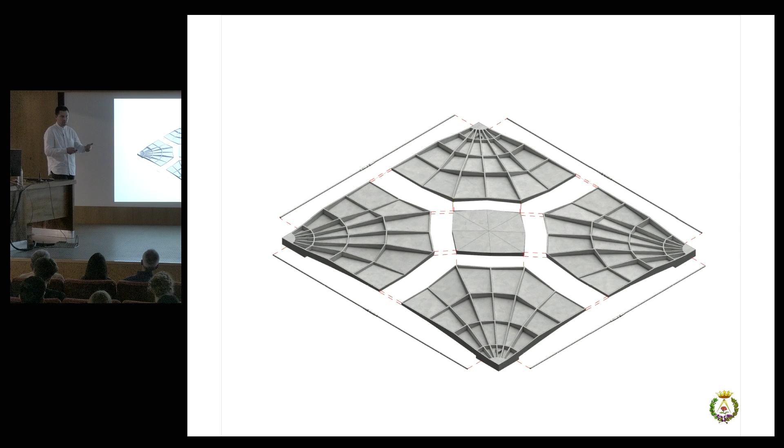Together with ZPF engineers, we created a system of a fully disassemblable hybrid between wooden vertical structures and Ripmann floor slabs, which can theoretically be disassembled, and this was the base for the building.

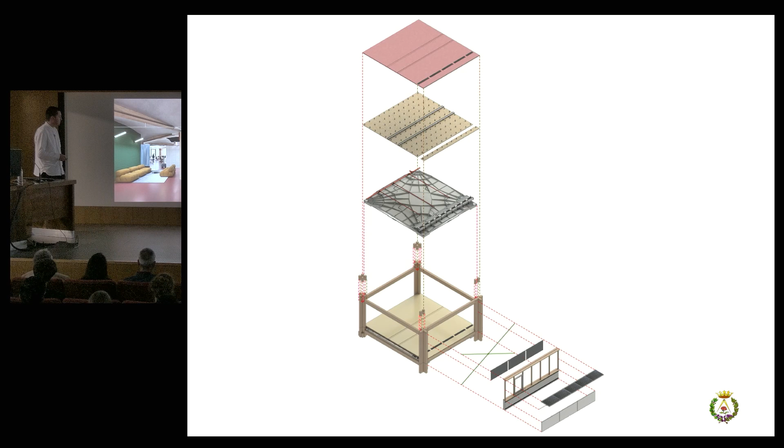The idea was that not only can you change the building, but you can also remove the slabs without losing the structural integrity. This also created these kinds of lock moments.

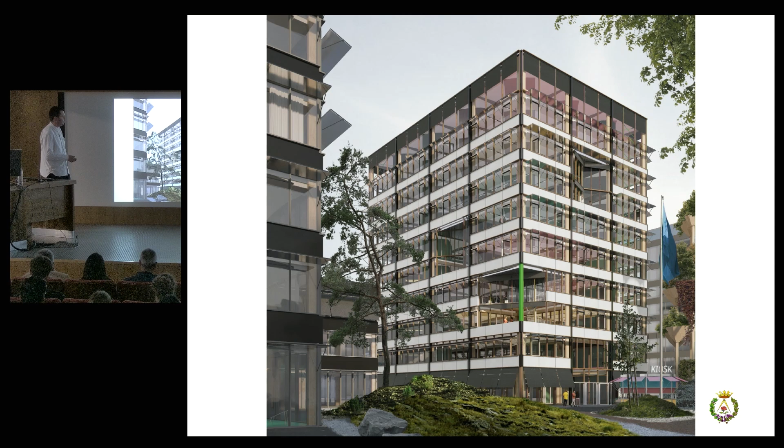From outside, the building looked pretty standard, and we tried to be pretty modest. But one thing you can see is that due to this, we created a series of what we call pockets or niches, which allowed us to remove some places and show the possibility of creating double height spaces.

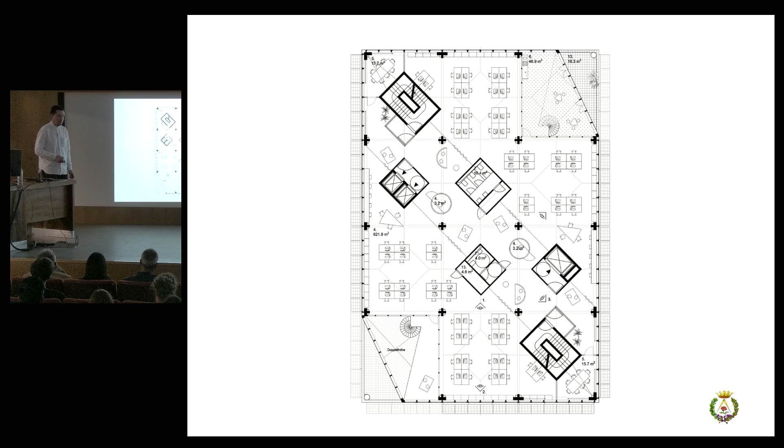And this was our mistake, so maybe don't do it anymore. We decided also to play with the position of the cores of the vertical circulation, and I guess that was one of the reasons why we lost, because it was maybe too ambitious and not too clear to the jury.

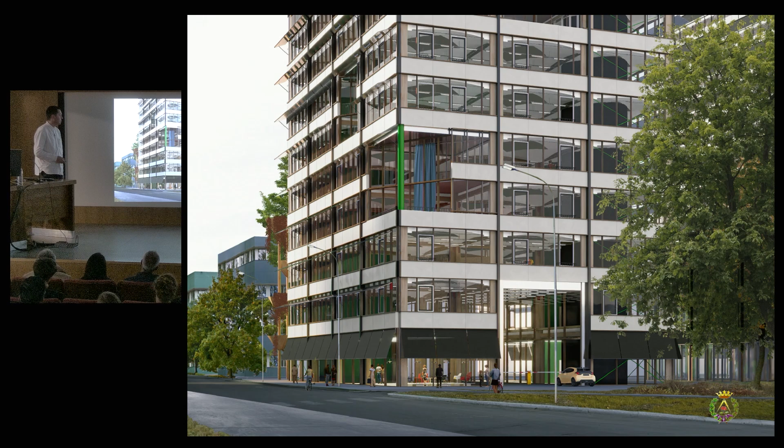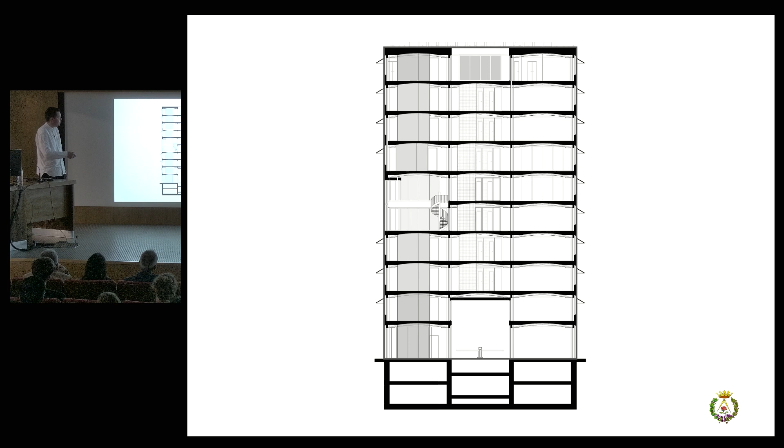But I think the general concept of disassembling the building was still pretty convincing. Here you can see these different volumes which can be created. And on the section you see the possibility of these double height spaces which migrate through the buildings, creating these moments of public gathering on different levels.